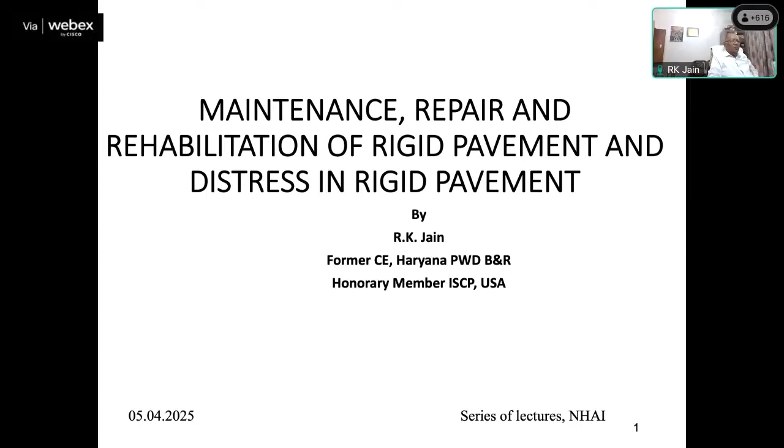An international conference was held by IRC in 2019. I was one of the keynote speakers and I coined this term at that time: India paves concrete waves for prosperity. So I fix it before any presentation. This is for all of you to consider, and if the Honorable Chairman thinks it appropriate, this can be adopted also.

In 1994, I went to Highway Research Station Madras, Guindy, and on the entrance board, this was there: Aristotle, a great philosopher. The search for truth is one way hard and another way easy, for it is evident that no one can master it fully or miss it wholly. But each adds a little bit to our knowledge of nature, in our case of roads, and from all the facts assembled, there arises a certain grandeur, ek bhavyata utpann hoti hai.

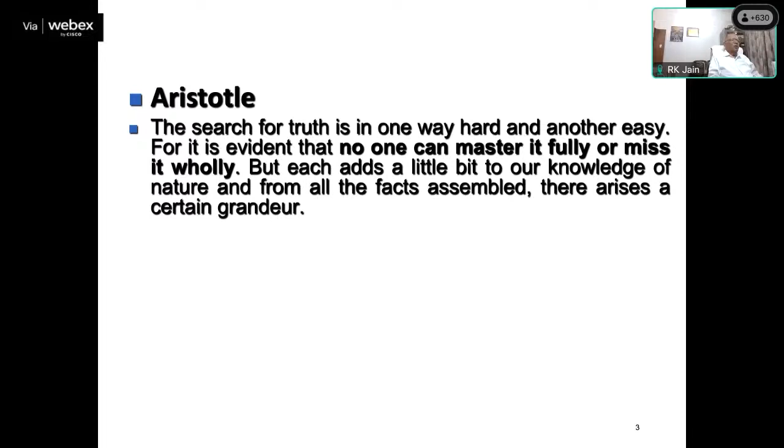So my humble request is this I developed, and hope somebody will take a lesson from it. The people in the field have to make a balance. If I call it in Hindi, samanjasya baithana hai, samanjasya.

Yes, now the presentation starts. Please.

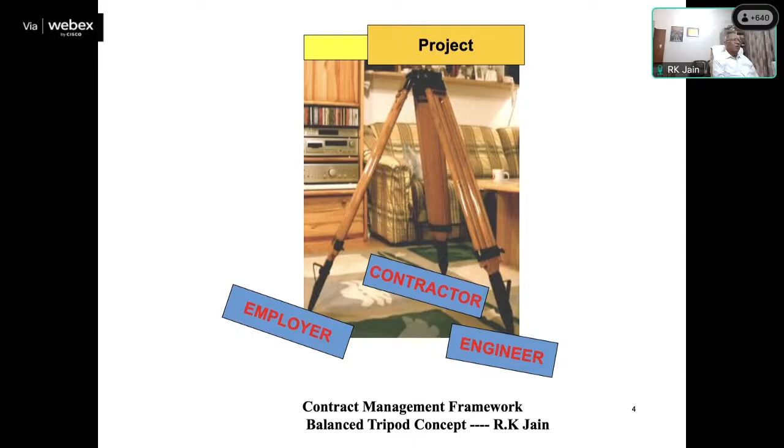This presentation mainly describes different kinds of defects which can develop: minor cracks, medium cracks, wider cracks, the process to fill the same, also full depth repair, partial depth repairs, replacement of slab, complete or partial - I have added partial also now. Most severe transverse crack, how to deal with this, and blow-ups. It also describes all kinds of defects under 5 major heads. The worn-out texture surface cases have been dealt with, the resealing of transverse and longitudinal joints, and corner cracks has also been dealt with.

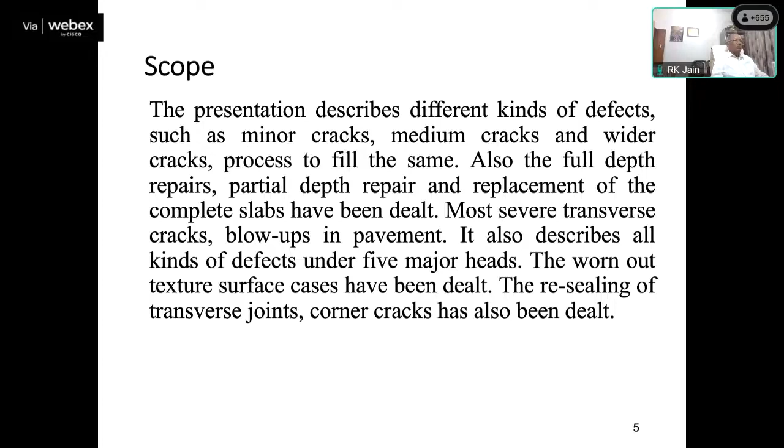Why do we need maintenance? Concrete roads properly designed and constructed should require minimum maintenance over its design life. However, properly timed maintenance may extend the life of pavement beyond its designed service life.

Now I will dwell on it. What do we mean by properly designed? In the previous lecture, I had shown that a well-constructed but poorly designed concrete road is better than well-designed and poorly constructed. This is a sentence I picked up from the Chicago conference on long life concrete pavements, where I represented India along with five more colleagues. I was sent by IRC there along with late Shri V.K. Sinhaji.

Now, most people will say, oh, concrete roads don't need repairs. This is a myth. They do need repair, but they need less of it. So let us remove this from our mind that concrete roads do not need any repair. They do need, but comparatively less.

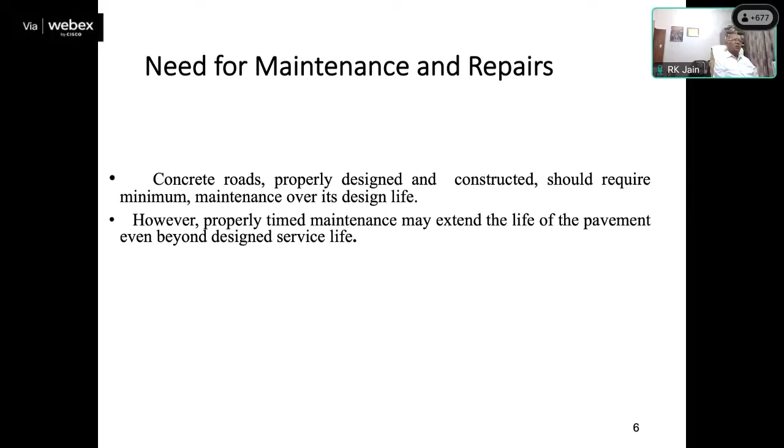Like any other pavement, concrete roads also undergo stress and strain due to traffic load and climatic effects, change of weather, seasonal, periodical and daily. However, uniform support is a very important aspect. Any variation or change in support due to moisture change, etc., has little effect on the performance. Now, what do I mean by this? Support should be uniformly distributed.

See the soil in embankment and subgrade, also your GSB and DLC. They should be functioning uniformly, not settling down.

Now I'll extend it further. If you kindly refer to my previous lecture, I had shown by actual experiments done on Delhi Katra Road Package 2 that we are all inadequately compacting our roads. I'll request Sinha Sahab and Rohit ji to circulate those two presentations to all who could not take advantage of listening to me at that time.

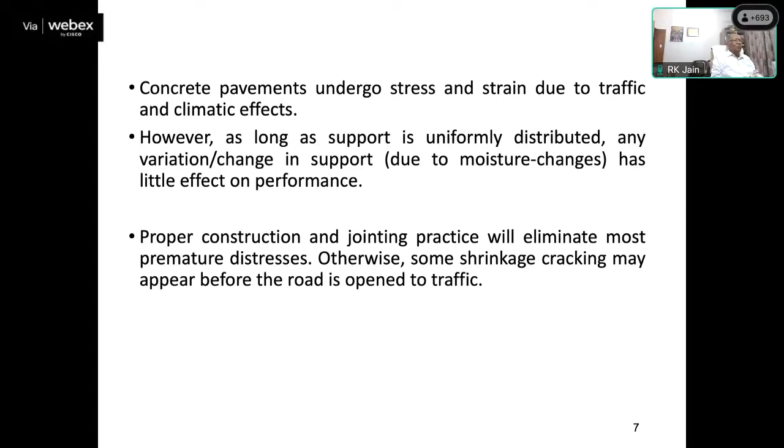Improper construction practice may jeopardize the structural integrity of the pavement. If we do not construct it properly, maintenance will be very much demanding. To realize the full benefit of the investment made, it is essential to maintain and repair the pavement timely and regularly. The defects are mainly due to poor sub-base design.

That is another issue - DLC and GSB are not properly designed. Poor pavement design, improper jointing, loss of support. Loss of support again happens due to settlement of subgrade and embankment, due to erosion and other reasons, possibly overloading also.

I'll pause here. Poor pavement design - this is ruled out, our designs are good. Improper jointing is still existing; we do not take proper care in constructing a joint.

Let me inform this house - Professor Dan G. Zollinger of Texas A&M University has given 4 PhDs only on joints. I saw some of his works physically. So this is very, very important, and we have to be very careful.

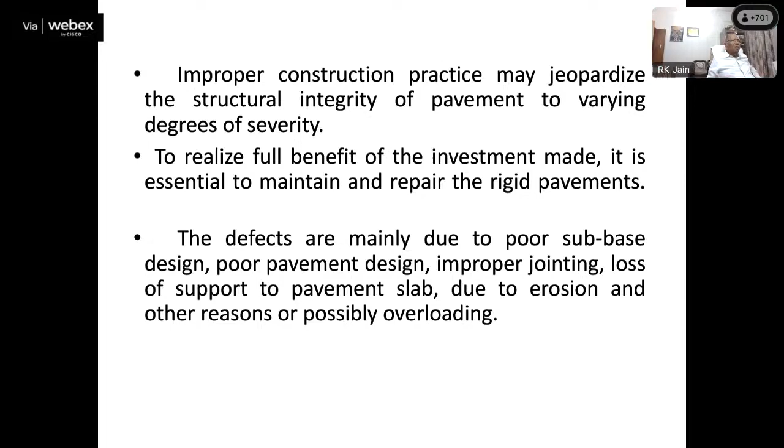In the book, I have listed out maintenance - routine maintenance, which embraces certain aspects. I have written this maintenance manual for NHAI. Mr. Venkat Raman, a friend of mine, called me - Jain sahab, please do this, because it was lying with CAS for 2.5 years. So I attended the office of NHAI for 12 days, and I am happy to say this is being used by NHAI now.

I would request that this should also be circulated, because our contractors and AI staff - many of them do not know about it. Let me tell you, I got it checked from Dr. Shiraz Tayabji, who was our advisor from USA at that point of time. This was perfectly reviewed - he made some corrections, and then I submitted it to NHAI.

These maintenance types - routine maintenance and emergency maintenance - are all given in this book, page 7. I will request you to go through it. Routine maintenance mainly involves keeping the pavement functionally performing. Start immediately, approval from higher authorities should not be awaited. This is not applicable for severely damaged pavement. Now let me give some examples.

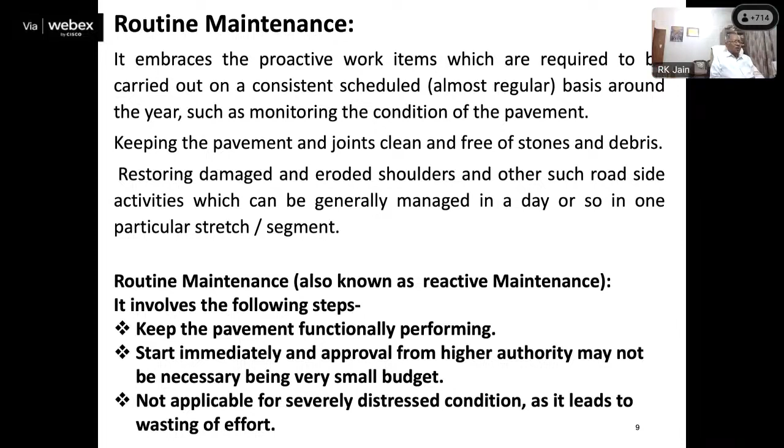So this, I have developed it from there only. Vegetation growth, line marking, road marking, signposts. Some of them were not there.

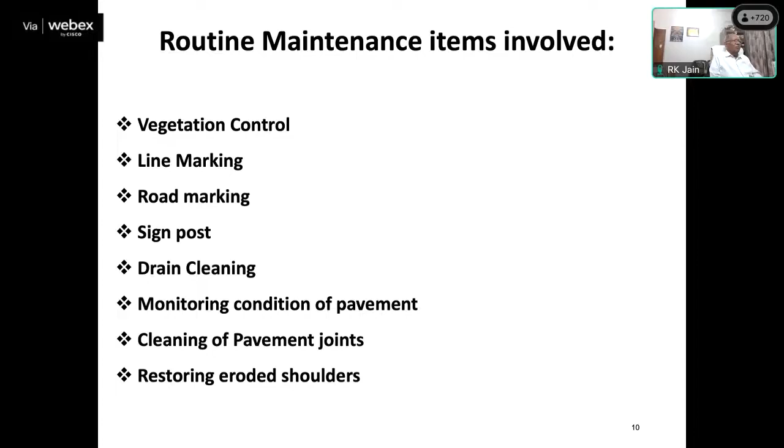As we program 5-year cycle or 6-year cycle for flexible pavement, such thing is also programmed for maintenance of rigid pavement. It is incidental repair, filling of pop-outs, potholes, generally planned activities such as resealing the defective joint sealant.

What is a pop-out? We have aggregates, and in those aggregates there may be some soft particles. With passage of time, those soft particles get eroded earlier than their neighbors, and a small hole is created. So in this IRC SP 83, we have given the treatment for that. Just widen it and put some concrete, that's all. Otherwise, this may lead to crack, may.

When potholes appear, why do they happen? When we construct the road, sometimes a pool of water is allowed to stand on the surface. In that portion, water cement ratio is different than the designed water cement ratio. Supposing designed water cement ratio is 0.42. In that portion, it may be 0.56, 0.6.

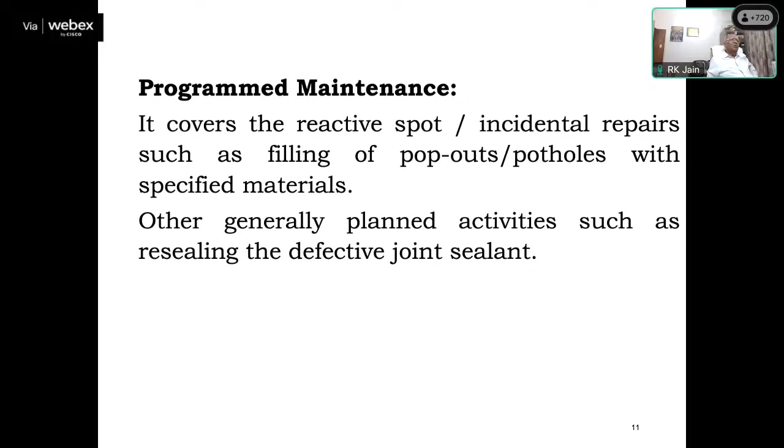So with passage of vehicles, this will erode. The top surface will go. It will skin off. And concrete below will be wiped out with the pressure of the tires, sucking action of the tires, and a pothole will develop. So this needs to be taken care. How do we repair it? I'll tell you as we go along. Next.

This is a program to re-establish the condition of deteriorated road. There are two things in it. This is programmed and methodology is approved. Now, Jain Sahab, kindly get checked up, and your other colleagues also. How many consultants have approved the methodology for repair of CC pavements?

It is a definite activity, sir. We do it in the case of flexible pavements. Why not in the case of rigid pavements? How much material will go, what will it cost, what size of pit has to be carved out. All these things they need to, because the field people have to be told.

Then cross-stitching, it is written in probably para 7.2, partial depth and full depth repair. I will deal as we go along. Removing faults with diamond grinding, this is very, very important. Now I'll define what is a fault. Between the two slabs, in the longitudinal or transverse direction, if the differential level is 4 mm or more than 4 mm, it is called fault.

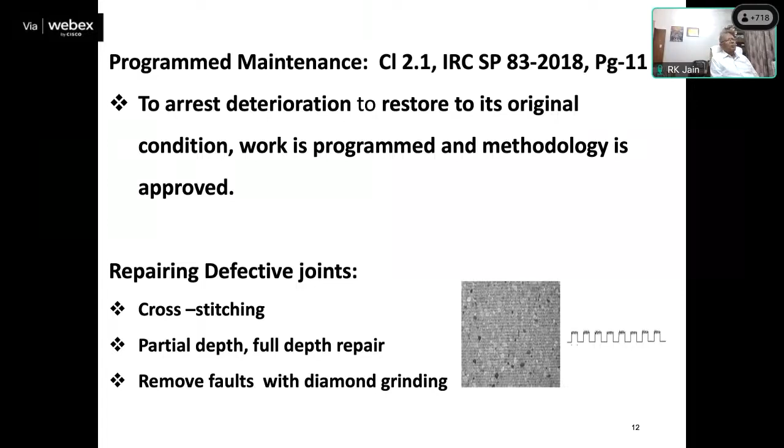Rehabilitation and strengthening refers to major restoration or upgrading of the pavement through diamond grooving for restoring the surface texture. Slab stabilization I deal separately. Reconstruction separately. These measures will consequently extend the life. Now let me deal in detail. Rehabilitation of this diamond grooving.

See, MORTH and IRC both have specified in concrete roads, NHAI roads, where the designated speed is more than 80 kilometers per hour, we do not do texturing, we do tining. And each tine, the land width is maybe 5 mm. Depth should never be less than 3 mm.

I can say definitely that all the AEs put their hand on their heart and see how many of them have checked it. I have checked it at 50, 60 places. I did not find it more than 2 mm. It will get abraded, eroded.

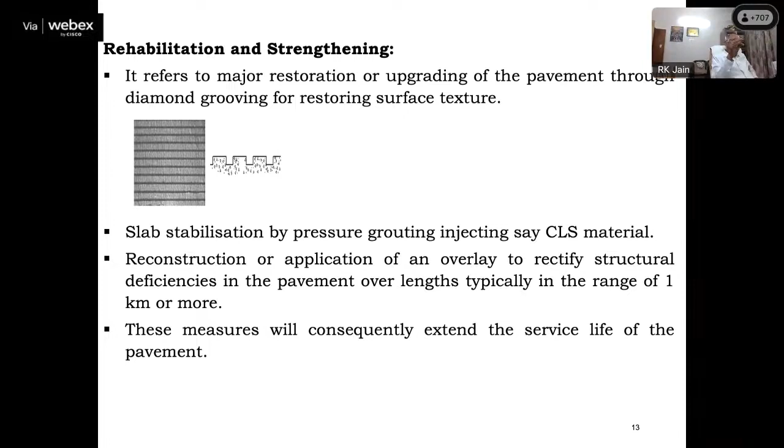Yes, sir. Emergency repairs: some complaint comes, some truck accident or something has taken place. There some portion of the road has got damaged. This has to be repaired. This is all given in IRC SP 83, and kindly get it implemented. Next.

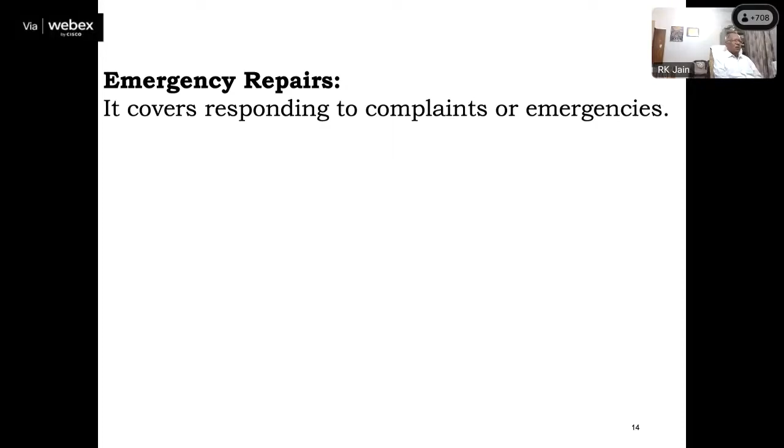I have taken it from this book, IRC SP 83. These parameters are given. We are constructing a lot of expressways also. These were not in the expressway. I picked up this and improved the presentation in the expressway manual IRC SP 99, para 5.4.3.

The roughness should be less than 2000 mm per kilometer in every 100 meter length. And I am happy to say at some of the places, initially, not after applying traffic for 5-6 years, initially we are meeting it. But because of other reasons, it settles and there are distresses. Yes, next.

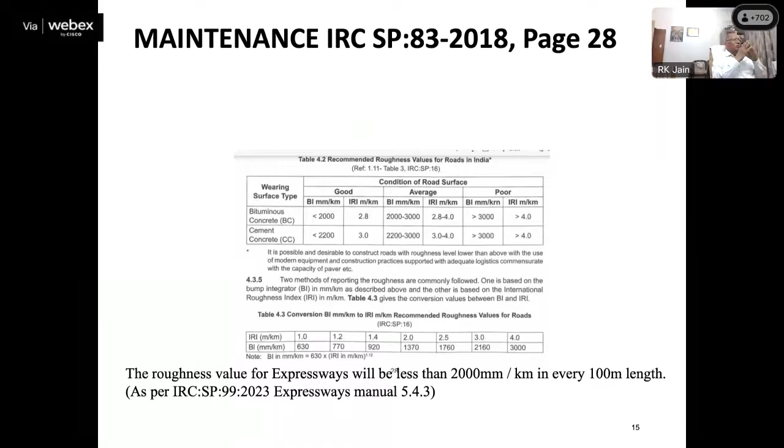So the concrete settles, and because of this volumetric change in moisture and thermal effects, there are some cracks also. They are initial cracks. We'll deal with them. Need for crack repair is dependent upon traffic level also. Now, incidence of cracks. Let me tell the house. The cracks can never be eliminated. They can only be minimized. That should be our effort.

Incidence of cracks can be minimized by improving mix design and jointing practice with timely saw cutting and properly managed curing. There is no reason a concrete road should not serve the design service life if cared for earnestly from design to maintenance. Now let me elaborate. Jointing practice, I have told, these joints have to be properly initial cut, final cut, inserting the backer rod, all those are given in IRC 57.

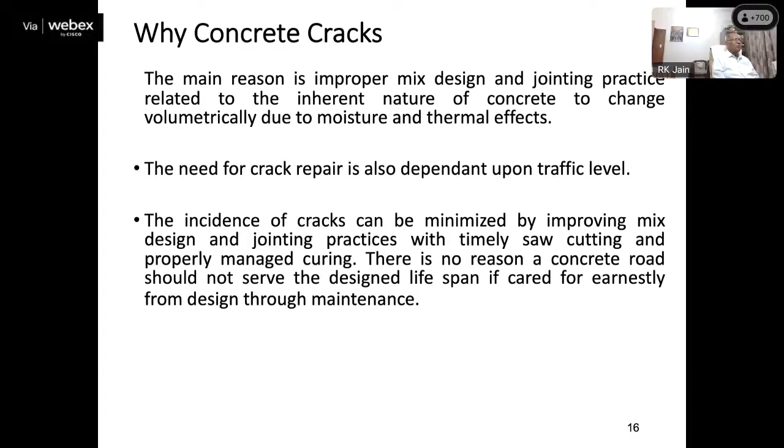If it does not happen, then your plastic shrinkage cracks will appear first. Plastic shrinkage cracks are not very harmful, but they propagate into deep cracks later on. Next. This is, I think, 18th. This is next, no?

Here, this is CPR, concrete pavement repair diagram. What is to be done? Bonded concrete can be done when the distress is not more than 10%. Then unbonded concrete, this can be done up to 70% also. After that, it has to be reconstructed, or as per IRC SP 17, different treatments are given.

And to take this diagram, when I was in IRC, we wrote to ACPA. And this copyright we got in 2008. We cannot use anybody's diagram. I had taken so many of them, they said $200 each. Then I wrote that this is not for commercial use, this is for educating, knowledge transfer. They said India is a friendly country, we give it free. So you'll find all of them in IRC SP 83. Next.

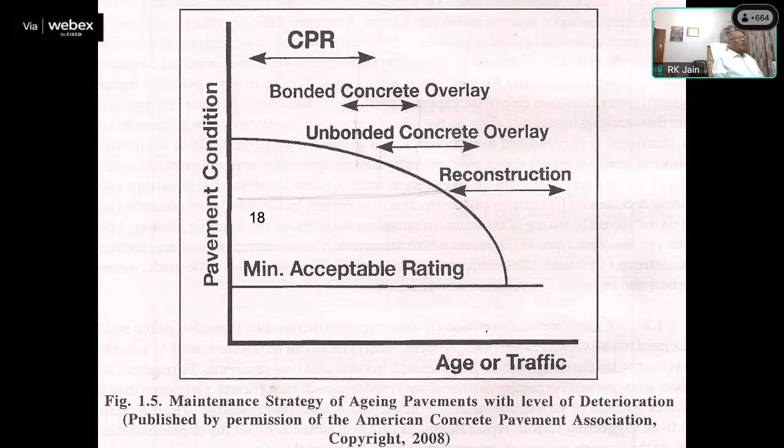Distress in concrete pavements is of two types, either structural or functional. The structural distress primarily affects the pavement's ability to carry traffic load. Functional distress mainly affects the riding quality, safety of the traffic, scaling, undulations, pop-outs, potholes, etc. We'll be dealing with both of them. Next.

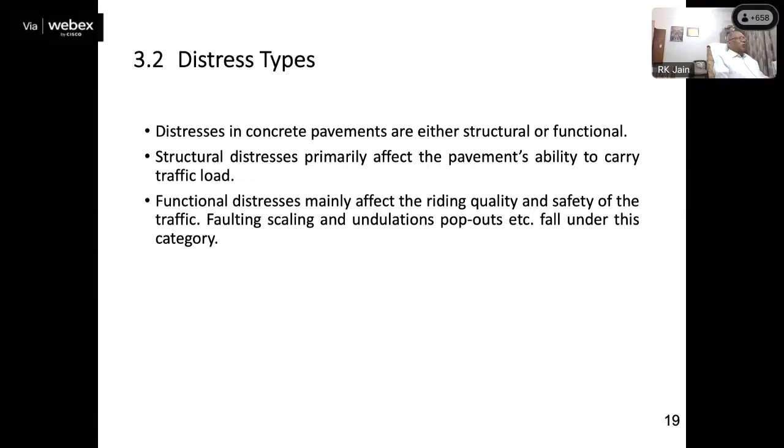All cracks are not structural cracks. Somebody mentioned the plastic shrinkage crack. Plastic shrinkage cracks initially are not structural cracks. Any uncontrolled or random crack, like longitudinal, transverse, diagonal, intersecting crack, that extends through more than half the depth of the slab is considered a structural crack. Up to say 1/3 of the depth,

I was reading, I think it was the California Department of Transportation, some specification, they say up to 1/3 of the depth, you do cross stitching. You can take care of that. Next.

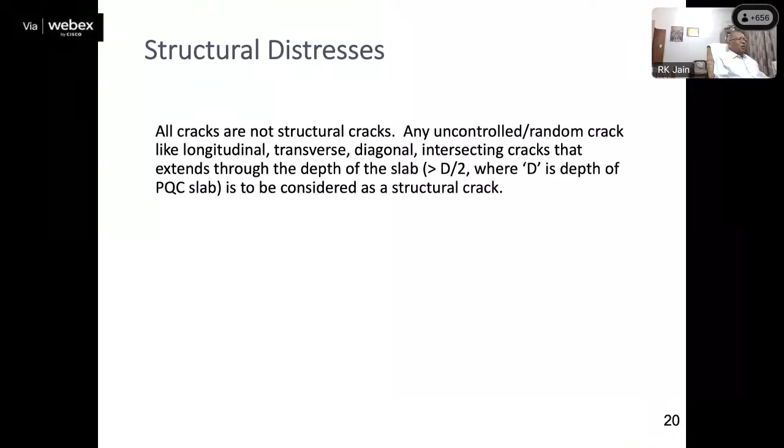Structural crack is often caused due to excessive loading. They are designed for certain loading. Because of certain reasons, the load is excessive. Joint spacing is more, shallow or late sawing of joints. This is very dangerous. Unwanted cracks develop, and most of them are through restraint at the base. Now, what is this restraint at the base or edge? Your DLC level is not good.

In spite of the fact that we have put polythene, when the concreting in PQC is done, because of its weight in compaction, the bottom of the PQC acquires the contours of the underlying DLC, and it causes restraint, and that restraint finally causes cracks. Then joint lockup.

What is joint lockup? Your dowel bar is not functioning properly. Why is it not functioning? Either slurry has gone into it, or the cap is much bigger than the diameter of the dowel bar, or it is not properly aligned. It is not in a straight line within the tolerance limits.

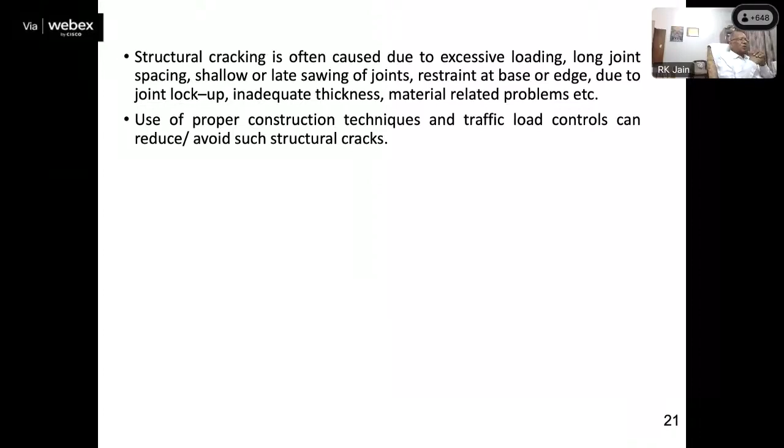Traffic control can reduce such structural cracks. Next.

Often reasons for structural cracks would be pumping of fines from the subgrade or the subbase. Excessive warping because of day and night temperature difference, it warps. Subsidence of utility: some utility is there, it gets settled, and over there the concrete also settles, and there is a cavity sort of thing. Then excessive temperature stresses and moisture content.

Structural cracks, unless repaired effectively, reduce the load carrying capacity of the pavement and adversely reduce the design service life. This picture, gentlemen, is from NH 28, Gorakhpur. I was chairman of the TRB.

When we inspected, I found half of the pavement is wet. I put this mark on it and found that some soil particles were coming out. So then I said, this is dangerous. What happened? Improper supervision. One fellow was putting sealant in the transverse joints, another was putting it in the longitudinal joint, and one depended upon the other. He said the other will do it. This junction was never filled with sealant.

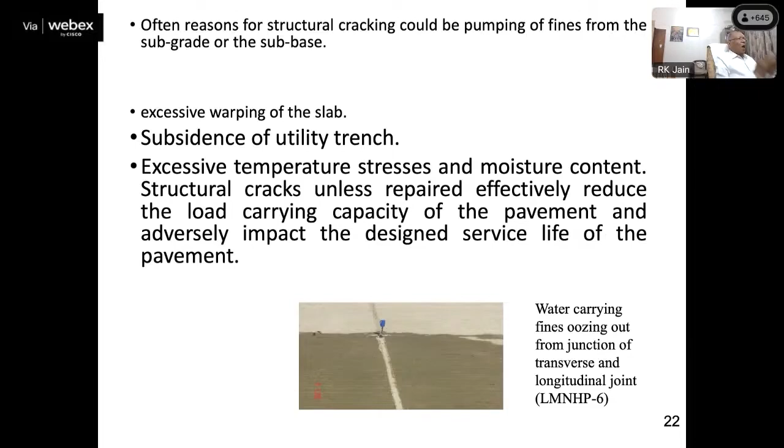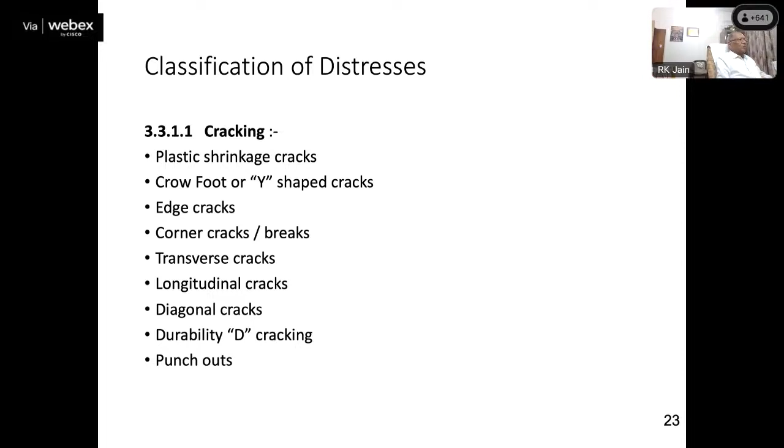Surface distress: pop out, small holes, animal wheel impression, scaling. The Kota gentlemen now explained that their pavement has scaled and they are doing diamond grinding. Raveling. Raveling is a phenomenon which is given in IRC SP 83. Raveling of the particles: when you do the initial cut, some loose aggregates come out. Nothing to be worried about, not to be afraid of. Some of them will come out, and let them come out.

But when you do the final cutting, say 10 mm or 8 mm, those small things will get encompassed in it. The second cut will be absolutely fine. So some raveling that way has to be permitted. Scaling is wiping off of the top fine material.

Then deep abrasion. Somewhere in the wheel path you find the concrete pavement abraded. There is something like, in flexible, we call it rut. It's not rutting itself, but something like rut. Scooping of surface: some accident has taken place and some surface has got damaged.

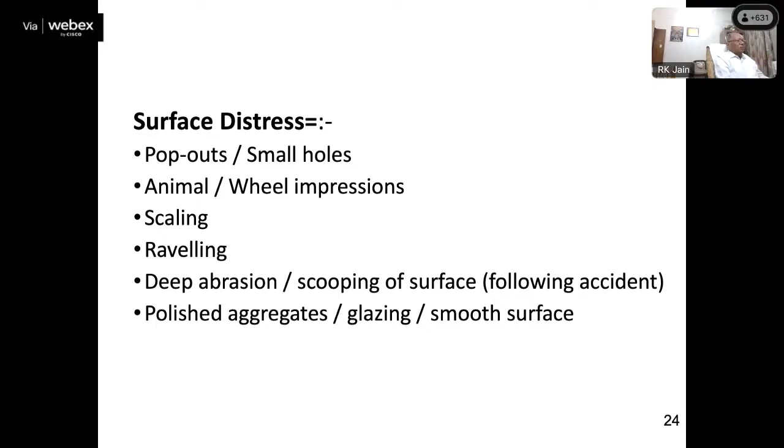Faulting, I told you, is the difference between the two panels, either longitudinal or transverse, 4 mm or more. Sealant failure or loss: sometimes sealant comes out. Spalling is different. Sorry, I beg pardon. Spalling I will explain. Spalling is when a portion of the concrete comes out near the joint. The faulting was 4 mm, then separation of joints.

The PD mentioned that's Ganjam district in Odisha. It was a particular case. And if some of you happen to go to that side, kindly inspect the road in Ganjam district. That was separation. But this separation of joints you can see on any pavement.

Central longitudinal joint and shoulder joint are found to be more than what they were designed. At the most a few mm, but at site they are 15, 20, some of them 30 mm wide. Reason: secondary compaction of earth. Otherwise, there is no reason they should be like this.

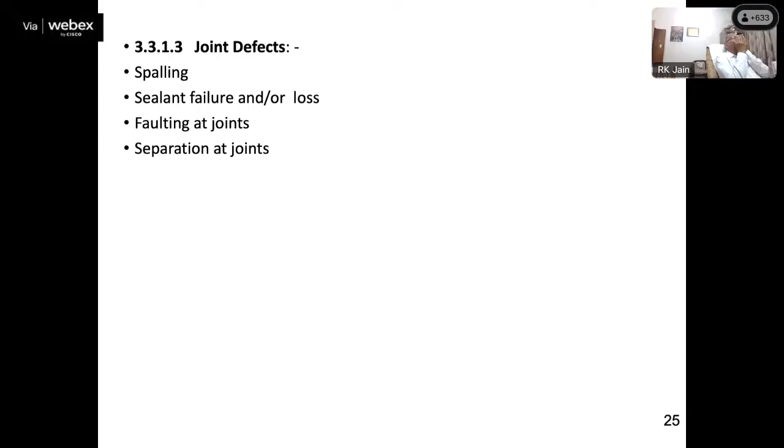Sealant failure. What is sealant failure? With passage of time, the sealant gets brittle. It breaks. And sometimes with suction action of the wheels, it comes out. So that is why that particular precaution: every pavement must be inspected before and after use. If it has failed, restore it. Then you are ensured that it will not cause any problem in future. Next.

Blow up, I will show the picture. This becomes a sort of two panels. They come in a shape of a loose convex formation, pumping of soils I have told, patch deterioration. Some patch was made, it was fixed up, and it has got deteriorated again.

Hardly any case. Drop off. Drop off at the shoulder gets lower than the existing PQC to a great extent, and it causes accidents. Next.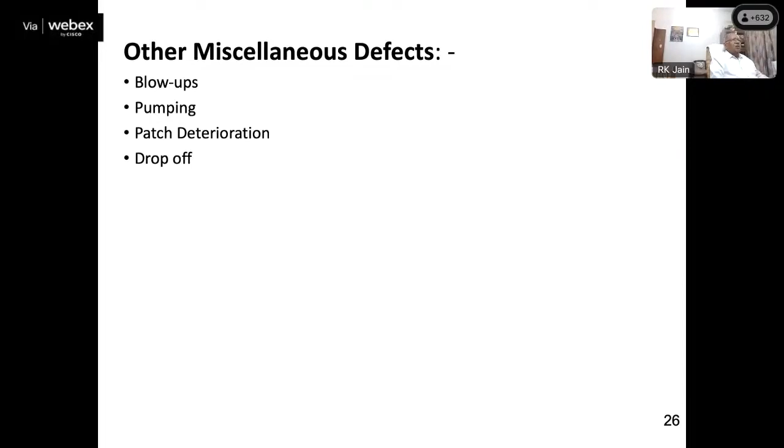Here somebody mentioned plastic shrinkage cracks. It is important not to confuse these cracks arising due to restraint of the concrete at early age, due to misaligned dowel bars, improper joint spacing, timing of joint cutting, with plastic shrinkage cracks.

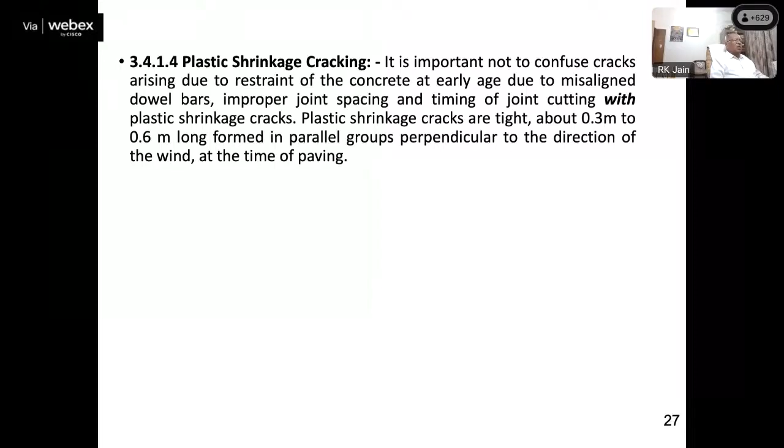Plastic, please go back, sir. Sir, go back. Plastic shrinkage cracks are tight, 1 feet to 2 feet long, and they are 20 to 30 mm deep. They are mostly in parallel, and they are also perpendicular to the direction of the wind. Next.

Plastic shrinkage crack is a result of rapid drying at the surface. The cracks normally extend up to 20 to 30 mm. Adequate curing measures are necessary to prevent their occurrence. If the curing is done properly, they will not occur. Experience has shown that these cracks rarely influence the overall performance of the pavement. Therefore, a superficial repair is done by injecting epoxy resin.

And somebody was saying कि इनको कैसे repair करें? In the session just ended: make a hole, inject flowing epoxy. They'll fill. There's nothing to worry.

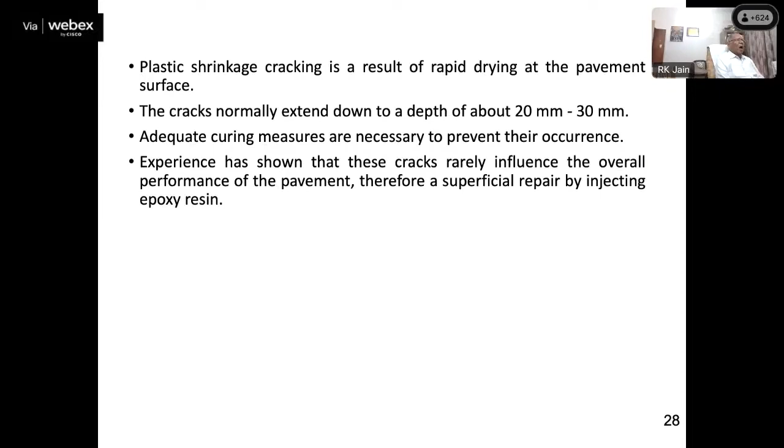Why does this drying happen? Because the surface area vis-a-vis volume of concrete is too much. So much evaporation takes place, and these cracks appear. The good way to prevent it is to do misting after 1.5 hours to 2 hours of doing the PQC. Misting or fogging. Fogging I got done on Samruddhi Expressway. Next.

Drying shrinkage cracks. They are dangerous. Wider, deeper cracking is usually attributable to the drying shrinkage and restraint developed in the concrete. Restraint, I told you, is the contour of the DLC; in spite of the polythene film being there, the nascent concrete of PQC will adopt that contour and will crack.

Inadequate joint spacing, yes. Improper saw cutting. Saw cutting should be timely and the proper saw should be applied. Misaligned dowel bars. Yes, the dowel bars are not properly aligned. The optimum spacing of joints in a jointed concrete pavement depends on slab thickness, subbase stiffness, and concrete strength.

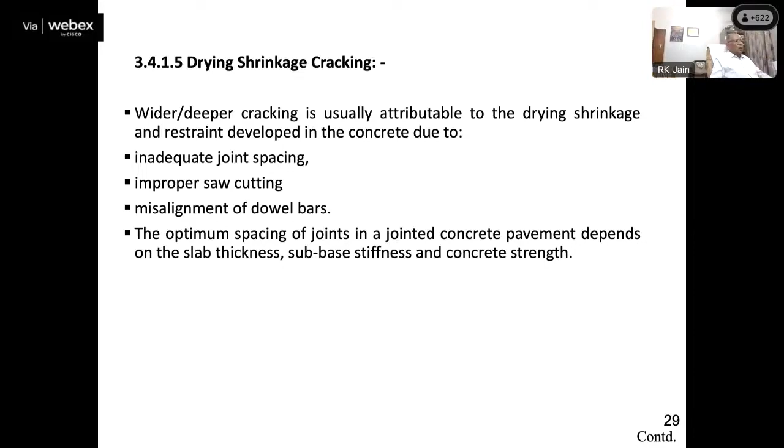Obviously, the American Concrete Pavement Association recommends this. How much should the spacing be? Well, it is not proper to put all sorts of pavement in this category. ACPA says the maximum can be 21 times the depth of the PQC slab. ACPA recommends maximum 21 times depth.

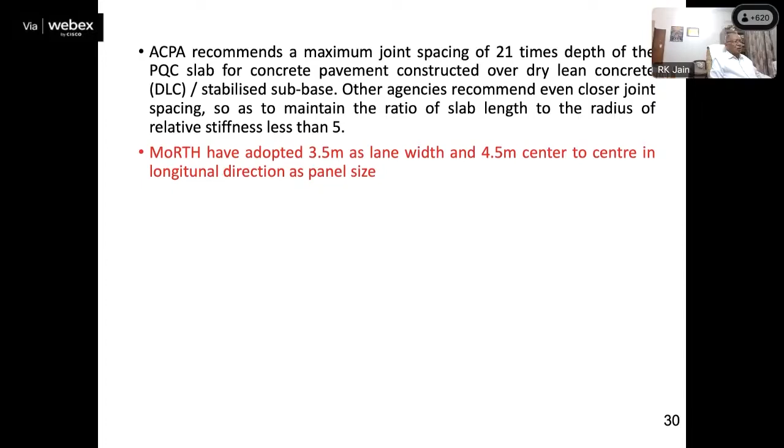The concrete pavement is further exposed to traffic loading and environmental influence, namely temperature. Because of that, the slab contracts and expands and some sealant gets damaged. This may act with overloading or with any other thing. So this environmental consideration influences the moisture content, also the relative humidity, all these things. Okay, chalo.

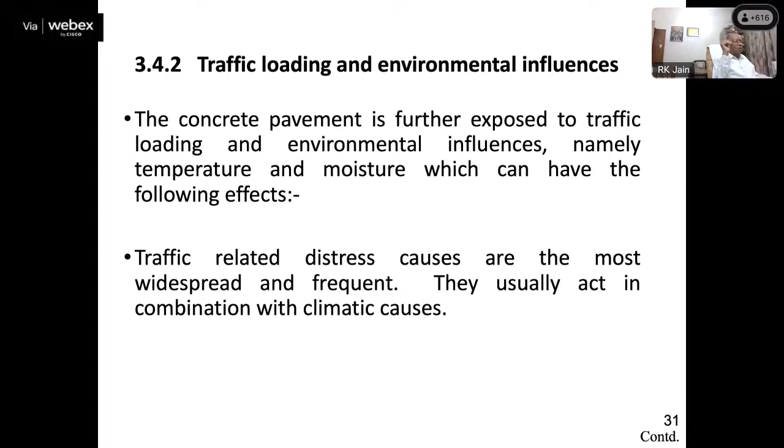Axle loads are responsible for fatigue and impact failure of the materials of different pavement layers, including consequent structural cracking, both shallow and full depth. ठीक है, आगे चलो.

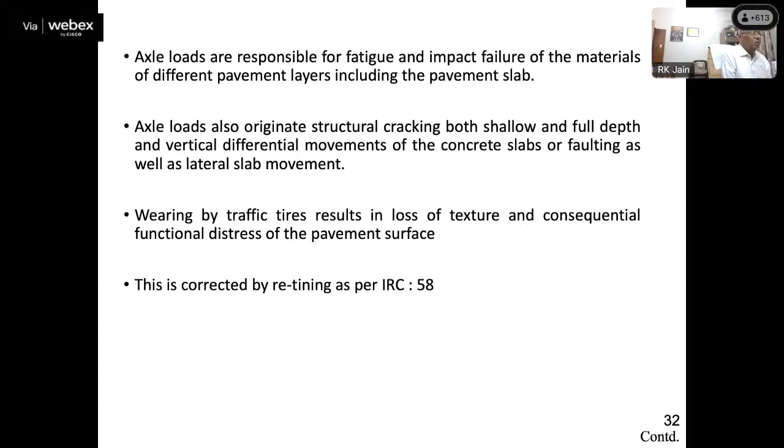Now this thermal expansion and contraction: because of daily changes and seasonal changes, these undergo expansion and contraction. That is why we put an anti-friction layer. We call it polythene film, or it can be 4 mm thick non-woven geotextile between the two, and side slabs also compress it. So they can damage it, and it may cause cracks.

Now temperature gradient. In 1984, CRRI made some experiments, and in every book and every code you will find that table of temperature, in which area how much temperature is going across. The sun rays always fall at the top of the slab; how much effect across this it will go up to the bottom. This is it.

They also initiate, and the slab curls. Because of that, during the day the slab becomes convex at top, and during the night it becomes concave at top. And because of this phenomena, the corners of the slab get lifted. And if a truck passes nearby on this corner, it will break.

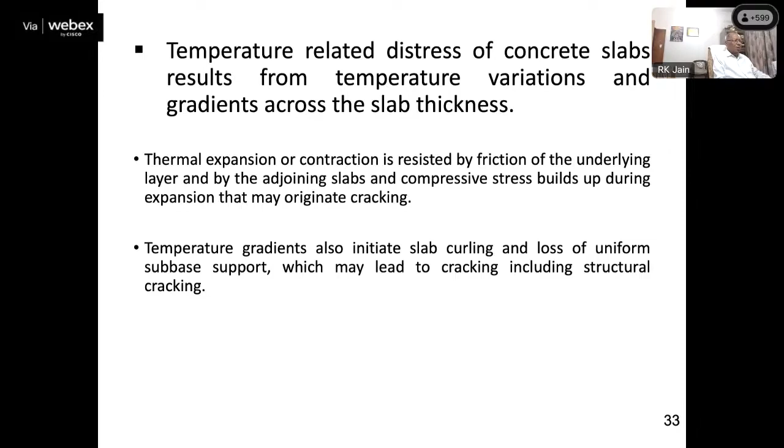Sinha sahab, yes sir. Rohit ji. Mr. Rohit. Am I audible? Yes sir, you are audible. Kindly move to the next slide.

Causes of these are related to workmanship, work methods, as well as equipment operating conditions, and unexpected changes in climate conditions.

What is it? Supposing your pavement is in Himachal Pradesh or the high reaches of Himachal Pradesh. Abruptly the wind changes and the temperature which was 10 degrees may come down to 4 degrees centigrade. Such abrupt climate changes, the concrete is not able to adjust to, and they may cause cracking.

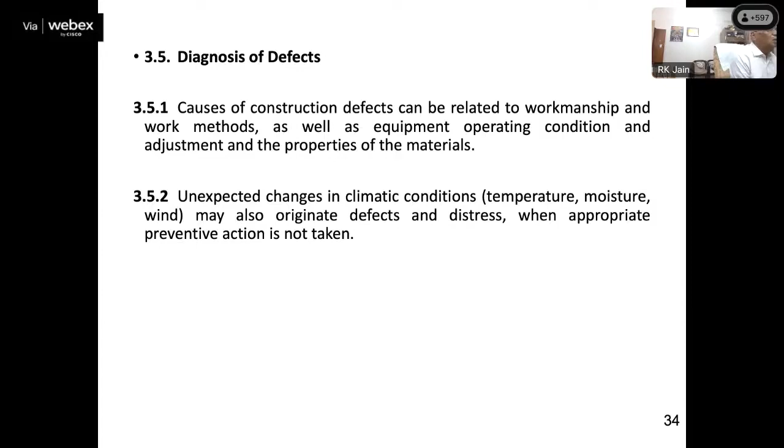Okay, next. So just to find out why it has happened, you can see the diary of the supervisor.

If the speed of the wind is more than 15 kilometers, what do we do to avoid these cracks? We erect a canat on both sides, and the wind velocity will get killed. See, if the wind velocity is more than 15 kilometers per hour, it affects the concrete pavement and it becomes ripple shaped.

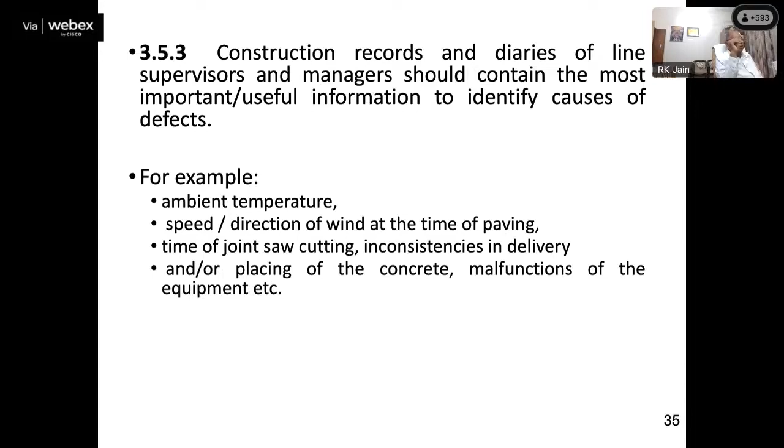Functional performance of pavement relates to characteristics of pavement that are important to the user. The characteristics primarily include safety as measured by skid resistance, texture depth, and riding comfort.

Now take one by one - skid resistance. If the depth of the groove, as I told you 10 minutes ago, is less than 0.75 mm, this distress is supposed to have happened.

How can it be measured? There is the British pendulum test, then SCRIM. It is the latest, and this SCRIM code has been formulated by IRC.

Then there is the bump integrator situation, also by noise measurement. I am not very clear about it, but this bump integrator does measure the longitudinal ups and downs.

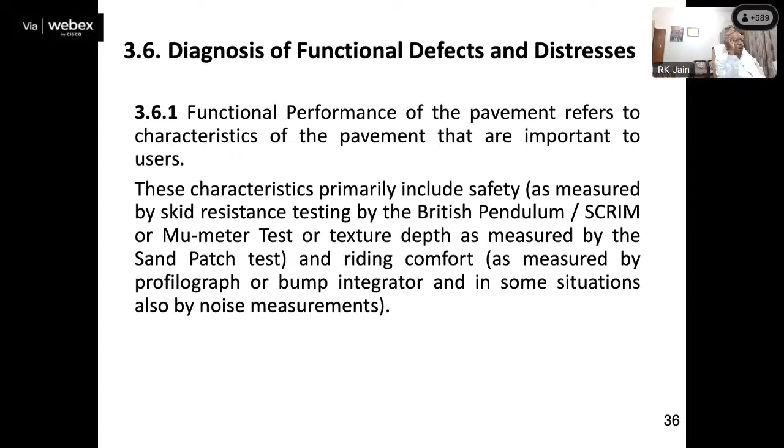Move ahead. This is the British pendulum. I have never used it.

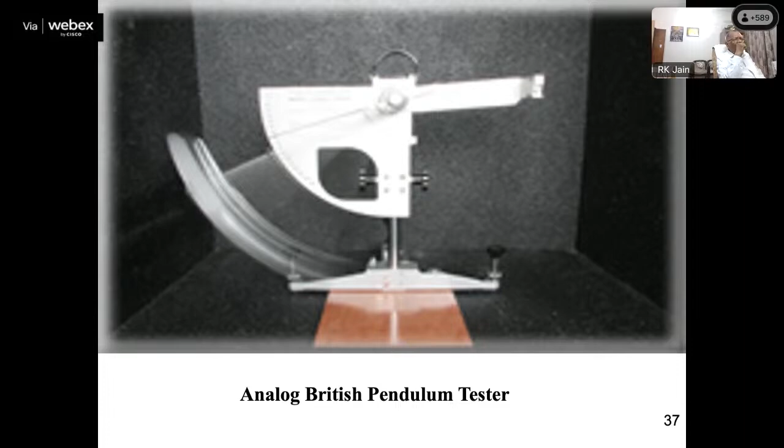Next, this is the digital version of that. It is telling that the surface slip is 0.118.

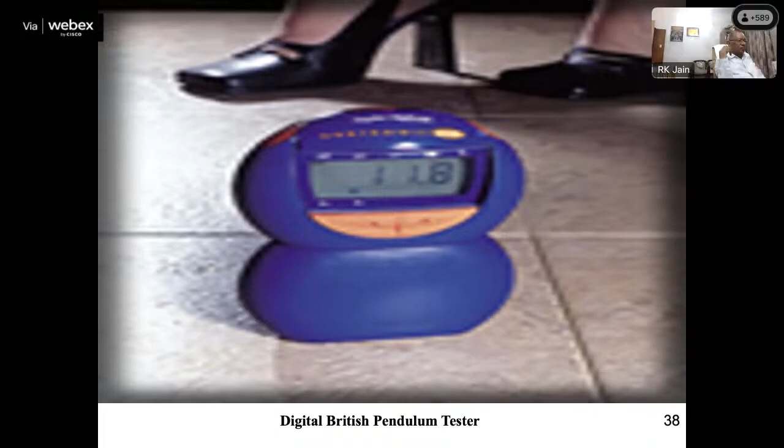Next. Yes, let's see. Structural performance refers to the structural adequacy of the pavement related to the load carrying capacity of the pavement - this is calculated, and the load lying on it should be equal to or less than that.

It can be determined by performing distress surveys like deflection testing, non-destructive testing, and material testing. The load transfer efficiency (LTE) of the dowel bar needs to be checked periodically to assess the requirement of additional dowel bars in the wheel path.

See, pavement may be all right, but dowel bar efficiency has gone down. So what do we do? We choose the wheel path and put 3 extra dowel bars in that - 1, 2, 3, 1, 2, 3, 1, 2, 3. This is how it is taken and the structure remains the same.

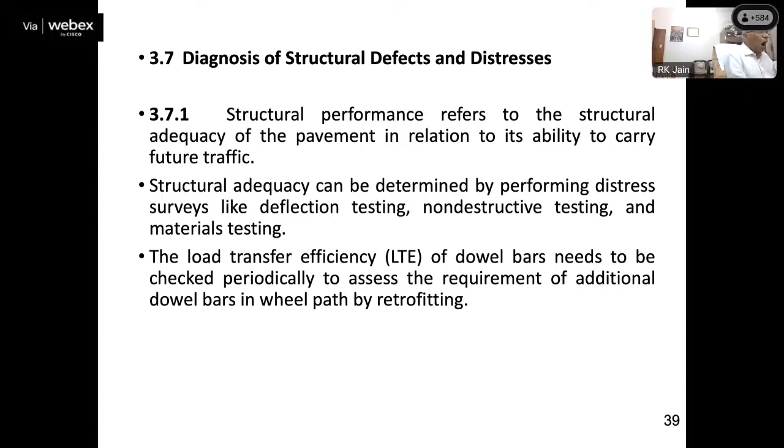Next, all these you kindly skip. I have lifted it from IRC SP 83. You can just remember one thing - the drying shrinkage test. That's all for me. Next.

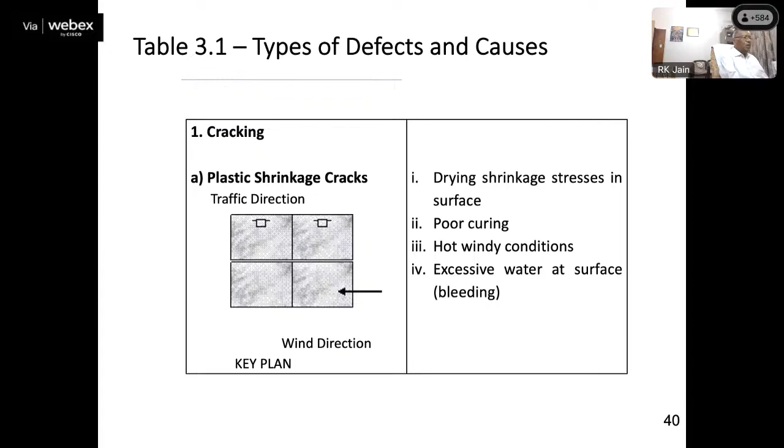Okay, move ahead. Next. I have done nothing, nor can I do anything here.

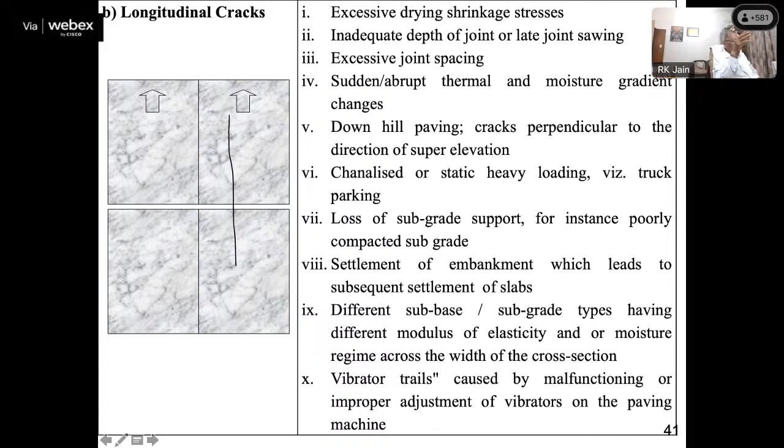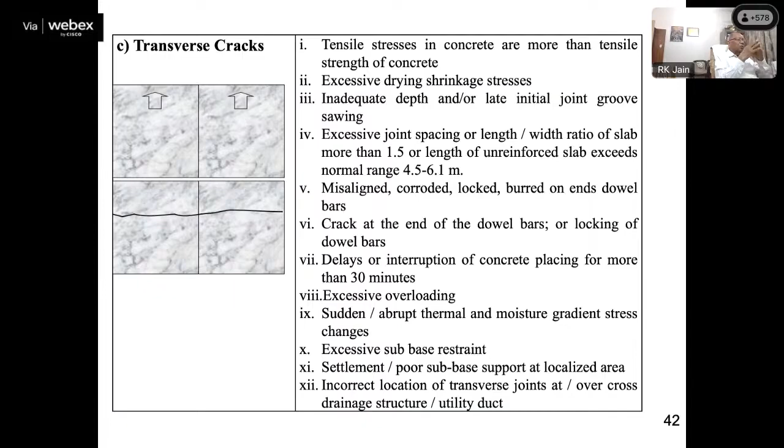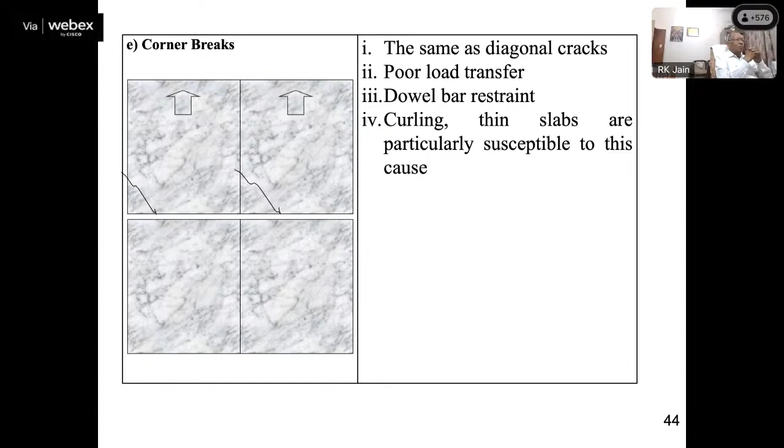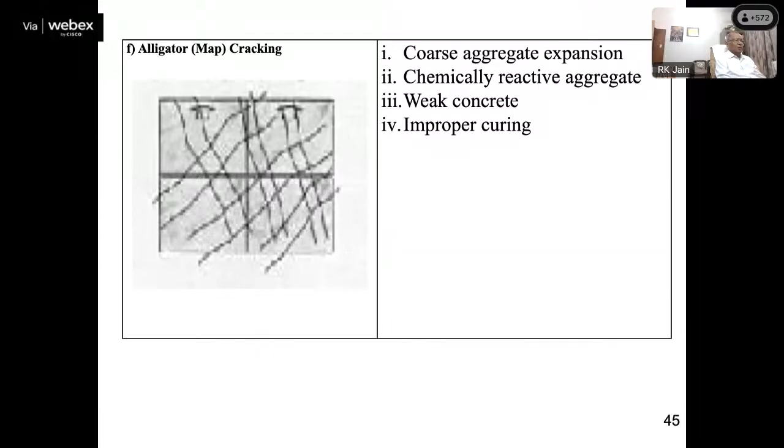Yes, anything - these are all from the book. I think I can skip it. Move ahead, let's skip this, it will take too much time. Go ahead, yes sir, go ahead.

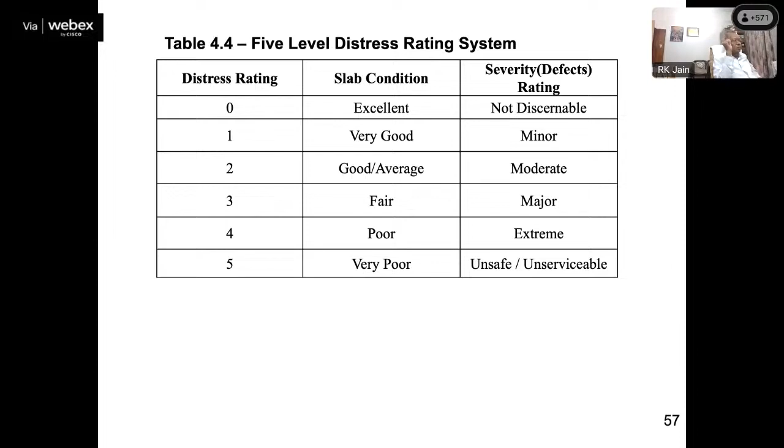Next. This is the condition. Next.

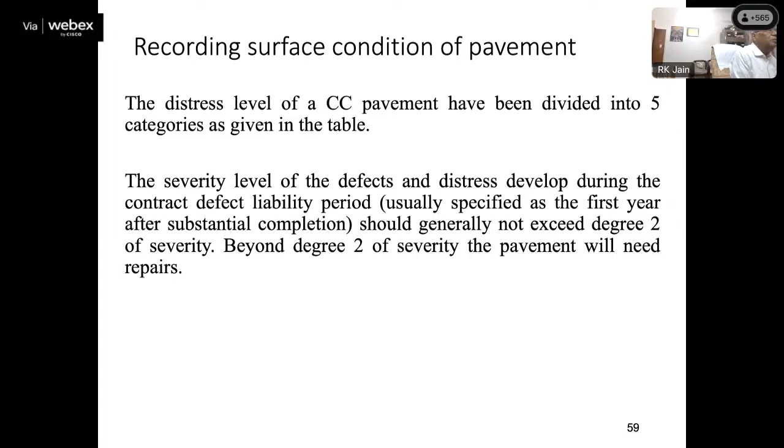5 categories given in the table. Next, this is important.

If not properly jointed, concrete slab may randomly crack in the first 3 hours. After placement, within 3-4 hours, there may be cracks which may not be evident. If misting or fogging is done, this can be avoided.

Improved curing practice has come - what is improved curing practice? Timely, but do only misting or fogging in the first 1.5 or 2 hours. No ponding - ponding to be done after making dikes. Improved curing practices are being developed, but there is little that can be done to minimize bleeding once the concrete has been placed.

It is very important, it's red. Why do potholes occur? This is the reason - when we use plasticizer, the base for the plasticizer is water. When we use it, it's quite okay, but when we see a pond of this water on the road surface, this is dangerous.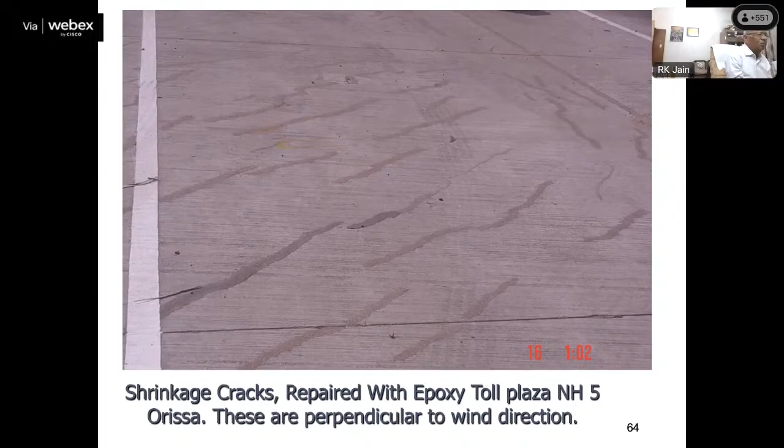Very same thing, let's move ahead. It has already come, hope this is not duplicate. Next.

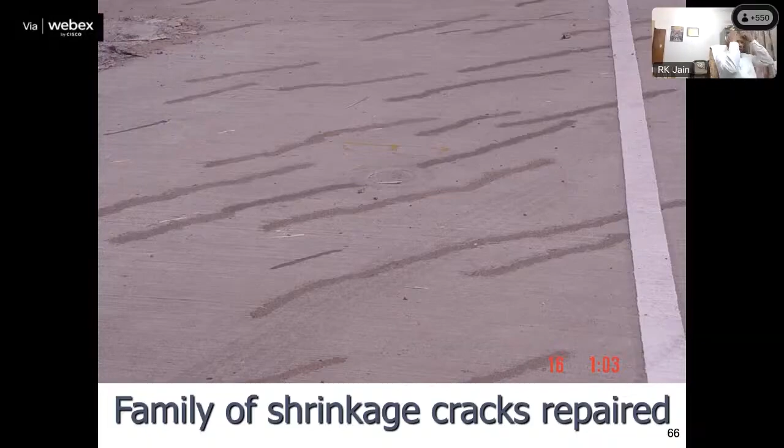Let's move ahead, yeah very typical. The MoRTH specification said the crack is like this - you remove both the panels. If I do that, more than half the panels are gone. So what I concluded is that this may be a different batch of cement, and let it stay. We'll fill it with epoxy, which we did, and there was no honest loss. Let's move ahead.

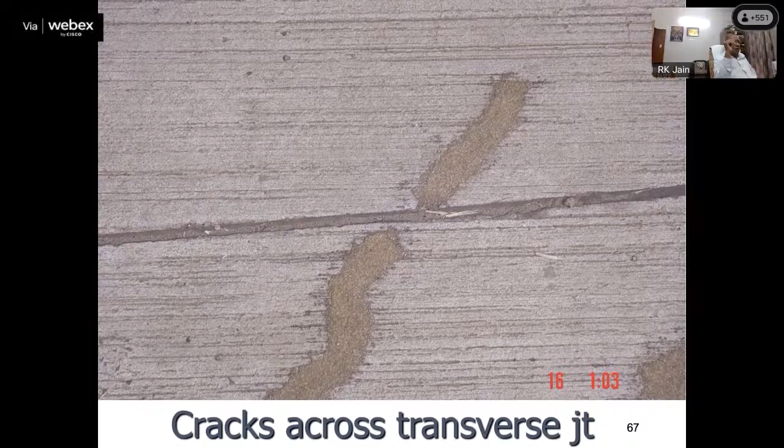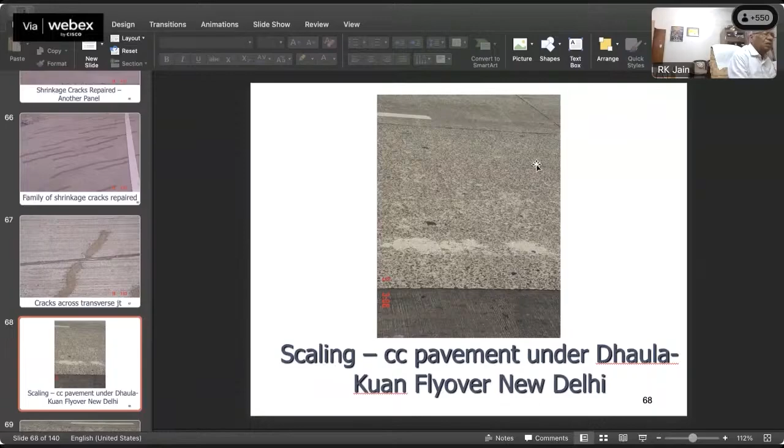Dhaula Kuan flyover - you must have seen 7, 8 black spots. I got it done simply from sand. And just see, scaling has happened near the flyover. Next.

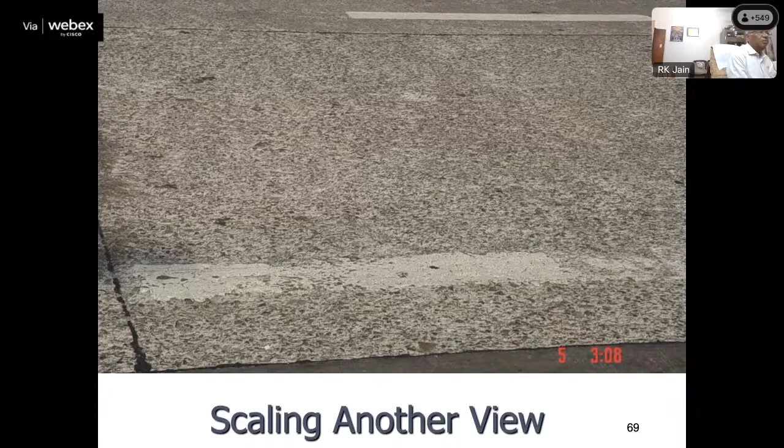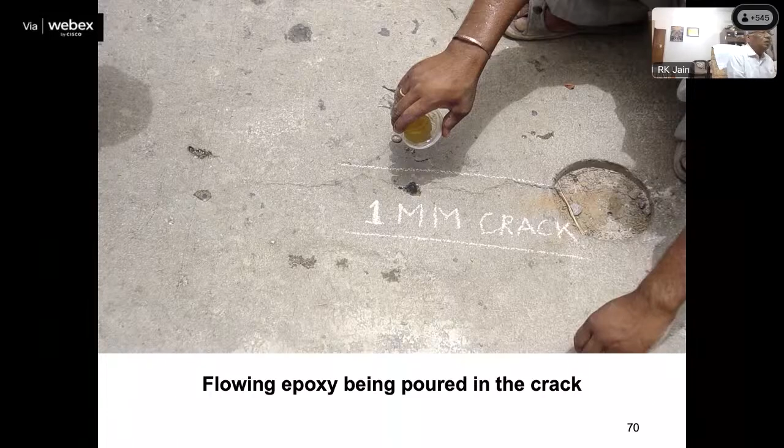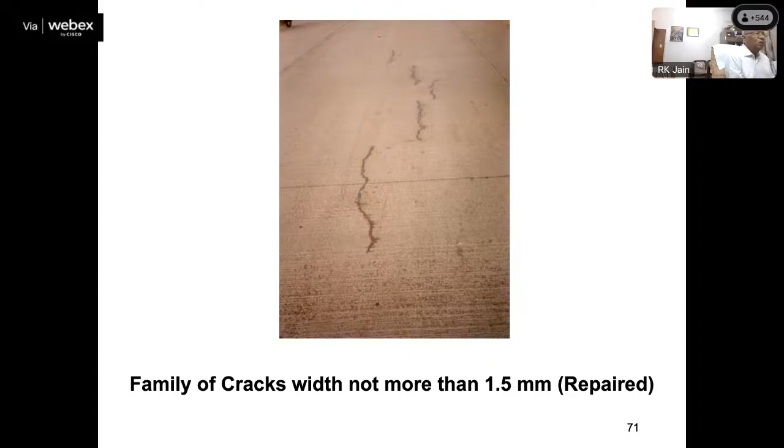Here also the crack is going on both sides. The code says if such a crack is there, you remove both the panels. I said no - when they are behaving okay, there is no skidding, no other problem, why should I waste it? Next.

This has taken place, I marked it with chalk - very simple. Run the blade, air wash, water wash and air wash. When it is dried in this manner, put epoxy resin. Next.

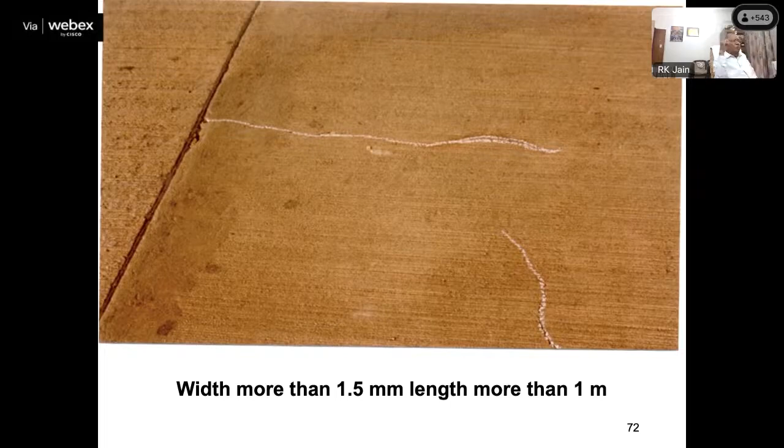This is it - more than 1.5 mm. The core was taken, it was established it is more than 1. Next.